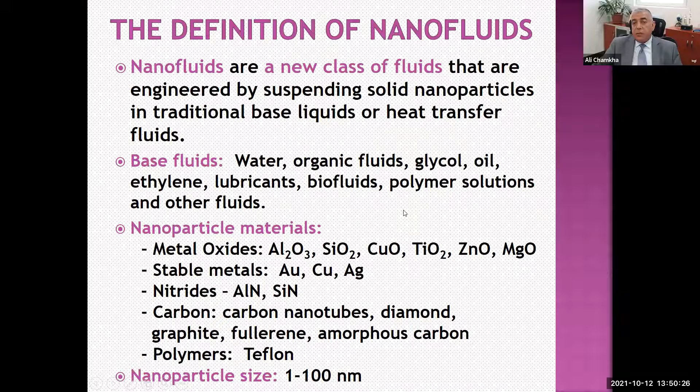Why are nanofluids important? Throughout the lecture, you will see the effect of nanoparticles in fluids called nanofluids. Conventional heat transfer or base fluids have inherently poor heat transfer properties compared to most solids. Nanoparticles have unique properties that can be exploited to develop ultra-high thermal conductivity fluids. Modern nanotechnology enabled the production of nanoparticles less than 100 nanometers.

So in principle, we have a low thermal conductivity fluid, and then we have particles with the thermal conductivity of a solid. We mix them together, fully suspended in the base fluid. Once we have that, the thermal conductivity of the so-called nanofluid will be much higher than the base fluid used in industry.

So therefore, here you will see thermal nanofluid heat transfer enhancement, thermal conductivity enhancement. Reports have shown a breakthrough substantial increase of 20 to 30% in thermal conductivity of a base fluid, by adding very small amounts, 3 to 4%, depending on the type of nanoparticles, of suspended metallic or metallic oxide nanoparticles or nanotubes.

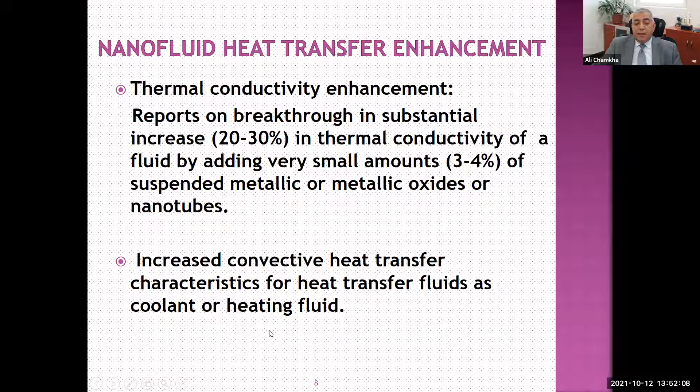Microparticles settle and tend not to add to the thermal conductivity, and therefore do not enhance heat transfer. They will also cause lots of problems in terms of erosion and corrosion of the internal pipe material. In principle, nanoparticles have a very high surface area, much less for microparticles.

If you look in terms of stability criteria, microparticles settle in the flow when suspended in a fluid, while the beauty of nanoparticles is that they remain stable in suspension almost indefinitely in the fluid.

Surface to volume ratio is 1 for microparticles; it's 1,000 times larger than that of microparticles for nanoparticles. Thermal conductivity is low for microparticles, high for nanoparticles when used in fluids.

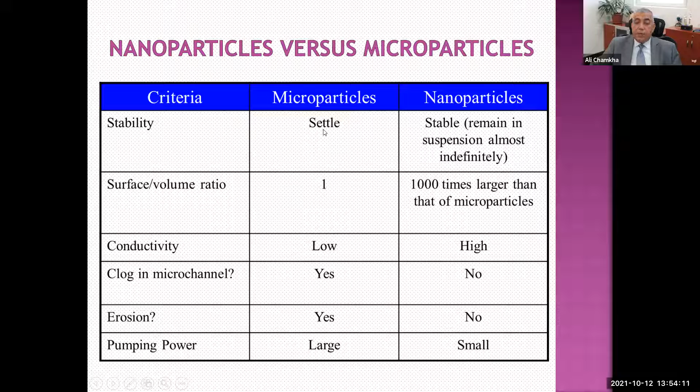The clogging of microchannels: microparticles do clog the channel, while nanoparticles, because they move along the same streamlines of the fluid, do not clog the microchannel. Erosion: because of their weight, mass, and bigger size, microparticles cause erosion, while nanoparticles do not. In terms of pumping power, it is larger to pump microparticles than it would be for nanoparticles.

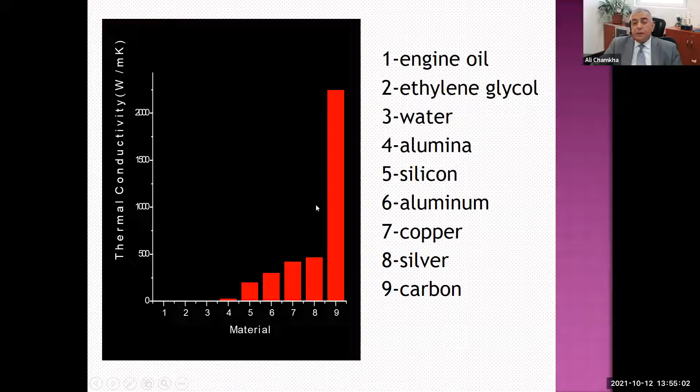What affects the thermal conductivity of nanofluids? The factors that enhance thermal conductivity are particle material - what it is made of, the particle size - big or small, particle shape, the base fluid in which the nanoparticles are suspended, the pH, particle volume concentration or amount, and temperature, which is also important.

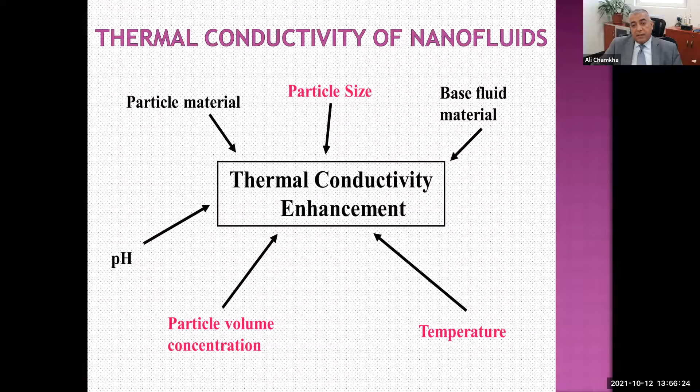Shape is another important factor - nanoparticle shape, whether spherical, cylindrical, or otherwise, matters as well. Now, potential benefits of nanofluids. Excuse me if I'm going a little fast because of the number of slides and the limited time I have.

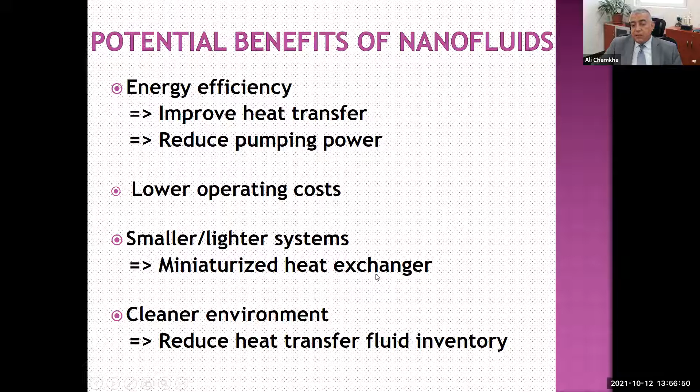Energy efficiency - you will have improved heat transfer. That's a benefit of nanofluids: improved heat transfer, reduced pumping power, lower operating cost, smaller, lighter systems like miniaturized heat exchangers, and a cleaner environment because you reduce heat transfer fluid inventory.

In terms of applications, the sky is the limit, but I will mention some here: energy conversion and energy storage systems, electronics cooling, thermal management of fuel cells, nuclear reactors, combustion, superconducting magnets, biological systems and biomedicine - this is heavily used in testing cases, drug delivery in medical applications, and heat exchanger systems.

Now, if I look at an example in a pressurized water reactor nuclear power plant, the limiting process in the generation of steam is the critical heat flux between the fuel rods and the water. Using nanofluids instead of water, the fuel rods become coated with nanoparticles such as alumina or others, which increases the critical heat flux significantly.

The use of nanofluids as a coolant could also be used in accidents, for example in a pressurized water reactor, in emergency cooling systems where they could cool down overheated surfaces more quickly, leading to improved power plant safety.

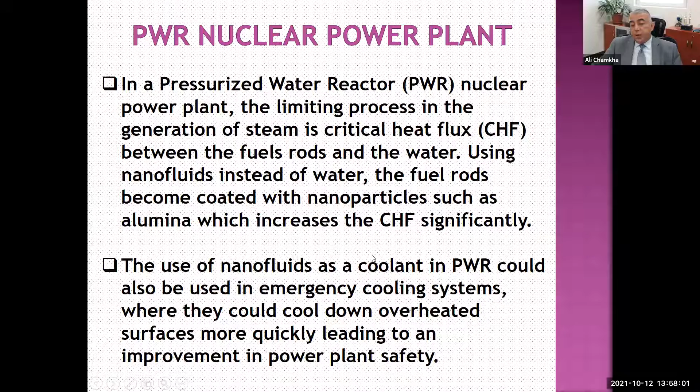Now, in automotive applications, engine oils, automatic transmission fluids, coolants, lubricants, and other synthetic high-temperature heat transfer fluids found in truck radiators, engines, and HVAC have inherently poor heat transfer properties. These could benefit from the high thermal conductivity offered by nanofluids.

Nanofluids as coolants allow for smaller size radiators and coolant pumps, and truck engines could be operated at higher temperature, allowing for more horsepower. They also lead to a reduction of the frontal area of the radiator by up to 10%. This reduction in aerodynamic drag can lead to a fuel saving of up to 5%, based on studies.

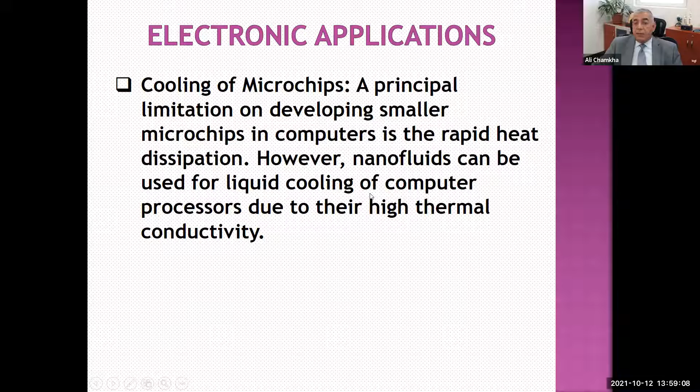If I go to electronic applications, cooling of microchips is a need for the computer business. A principal limitation for developing smaller microchips in computers is the rapid heat dissipation. However, nanofluids can be used for liquid cooling of computer processors due to their high thermal conductivity.

In biomedical applications, which is very important, cancer treatment is very important. Iron-based nanofluids can be used in cancer imaging and drug delivery or radiation. Magnetic nanofluids can be used to guide the nanoparticles up the bloodstream to a tumor with magnets. This will allow doctors to deliver high local doses of drugs or radiation without damaging nearby healthy tissue, which is a significant side effect of traditional cancer treatment methods.

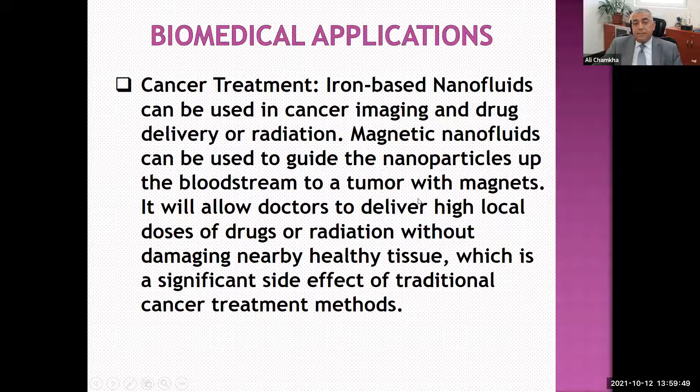Now, unique properties of nanoparticles, as we said: size-dependent physical properties, larger surface area, larger number density, and surface structure.

The effect of nanoparticle clustering is important. The beauty of nanofluids is that the nanoparticles remain suspended in the base fluid at all times—this is when you get the most effect from them. There is lower enhancement of thermal conductivity for closely packed clusters. Agglomeration is a problem when particles cluster together, whereas high enhancement of thermal conductivity occurs for clusters of particles separated by a liquid layer, which is better.

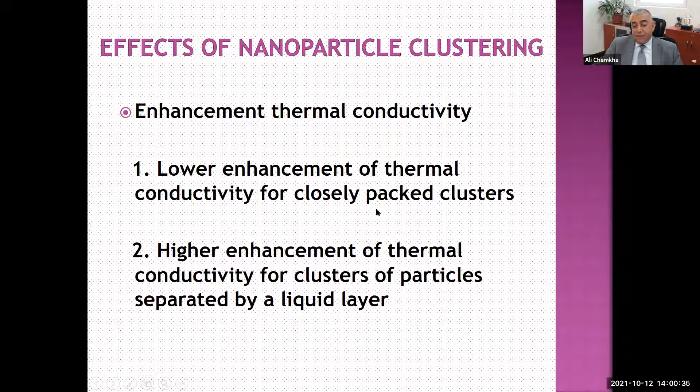Looking at this picture of thermal conductivity versus volume fraction: if you have completely packed nanoparticles, they become bigger particles with no fluid between them, so the thermal conductivity is low compared to more separated nanoparticles. When you allow the fluid to go inside, like here, you get more heat transfer effect.

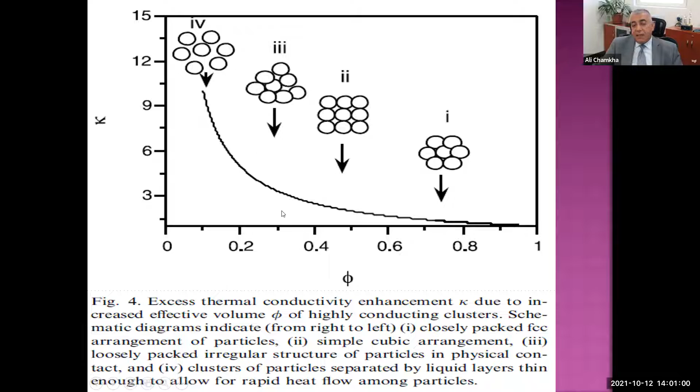What problems do nanofluids face? The rapid settling of particles in fluid—if they settle and do not remain suspended, this is a problem. The small size of nanoparticles should improve the stability of the suspension, but agglomeration is the biggest problem studied, where nanoparticles combine into larger particles found in liquids, which is a serious challenge. When nanoparticles agglomerate with other particles, they become bigger particles and we cannot benefit from them. So sedimentation, settling, and agglomeration are the problems.

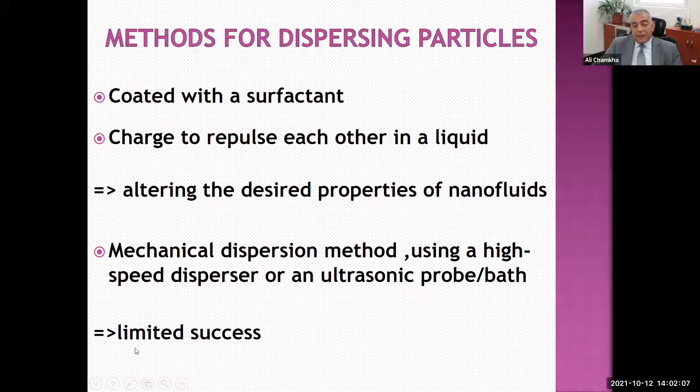What are the methods for dispersing particles? One is coating them with a surfactant, charged to repel each other in the liquid. However, if we use this, we alter the desired properties of nanofluids, so we don't get the benefits we need. Another is the mechanical dispersion method, using a high-speed disperser or an ultrasonic probe bath, which has shown limited success.

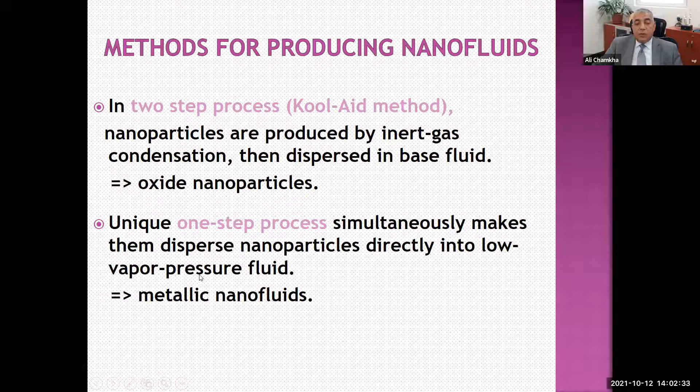Methods for producing nanofluids: we have the two-step process, where nanoparticles are produced by inert gas condensation and then dispersed in a base fluid—this is usually used for oxide nanoparticles. There is also the unique one-step process, which is better, simultaneously making and dispersing nanoparticles directly into a low vapor pressure fluid; this is usually used for metallic nanofluids.

Why are nanofluids investigated? They have been studied to identify the specific transport mechanism, to identify critical parameters, to characterize flow characteristics in macro, micro, and nano channels, to quantify heat transfer performance, to develop specific production management and safety issues, and measurement and simulation techniques, among others.

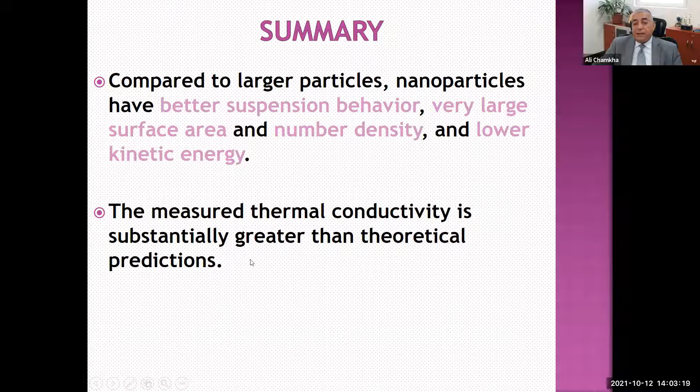In summary, compared to larger particles, nanoparticles have better suspension behavior, very large surface area and number density, and much lower kinetic energy due to their low mass. The measured thermal conductivity is substantially greater than theoretical predictions in reality.

Now I want to run through various types of problems that I have solved over the years using nanofluids, using different nanofluid models and different problems, and see the various things we found.

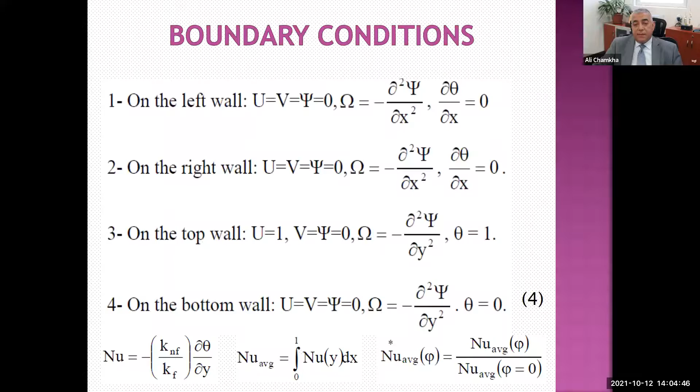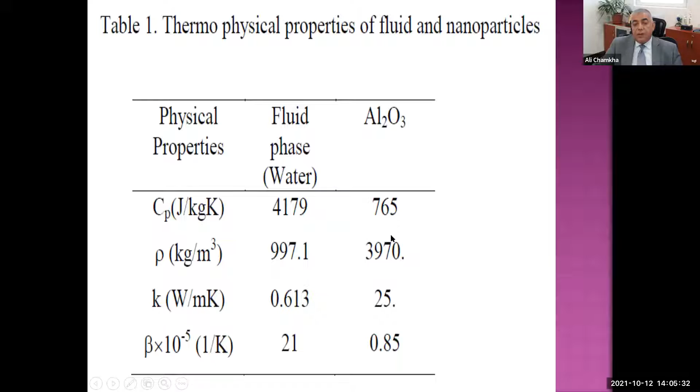For the thermal conductivity model, we use the Maxwell-Garnett model. This is the model, and then we predicted some properties for the base fluid, being water, and alumina. The thermal conductivity is 0.613 for the base fluid water, while it's 25 for the alumina. Mixing those together gives better performance in terms of heat transfer.

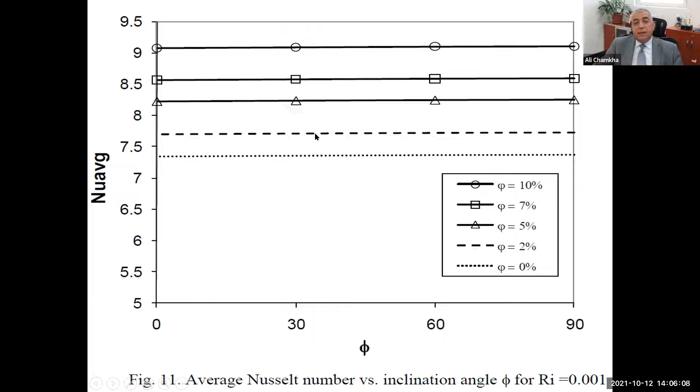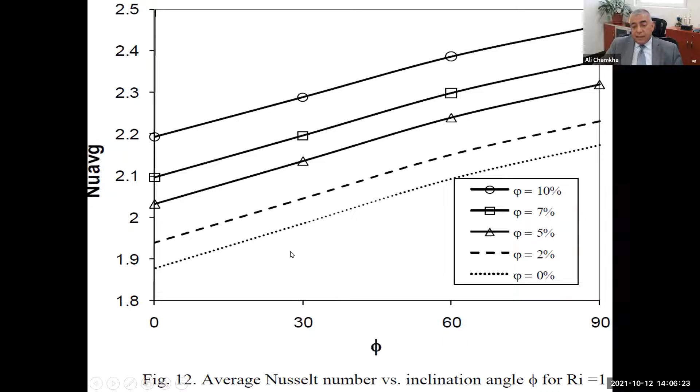You will see that in principle, as you increase the volume fraction, you will have an increase of Nusselt number. This is the case of Ri=1, mixed convection. You will see as you increase the inclination angle from 0 to 90 degrees, the Nusselt number increases, as well as it increases as the volume fraction increases, and they look linearly increased. Same thing for the fully convection case, where the Nusselt number increases as the inclination angle and volume fraction increase.

Now for another problem, we used a solar collector filled with a nanofluid. This is a schematic diagram of the solar collector. You have solar energy coming in this way. This is the cover plate, this is the water-alumina nanofluid, this is the wave-like absorber we were considering, this is the cool surfaces, this is insulation, and this is the hot surface from the radiation.

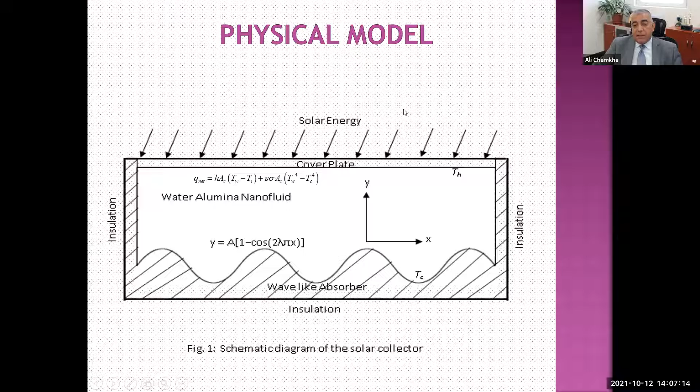We calculated this based on the basic principles of Navier-Stokes equations, modified to use the nanofluid, as you can see here. These are the properties. Here we're using the same thing, the Brinkman and Maxwell-Garnett model, with no changes here.

If we look at some of the results for different shapes, these are typical isotherms and typical streamlines. You will see the occurrence of multiple vortices in the system, which will affect the heat transfer. When the absorber has only one shape with no wave, you will see one streamline, one vortex enclosing the whole system.

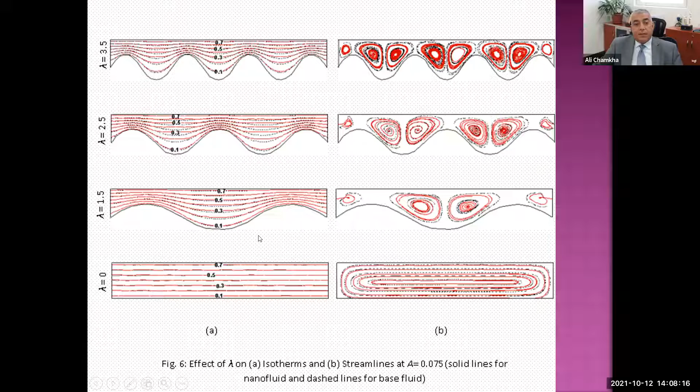Same thing here, you will have a different type - now we're varying the effect of lambda. And then if you look at the Nusselt number here, this is the nanofluid. You'll have enhanced heat transfer or energy collection using nanofluid.

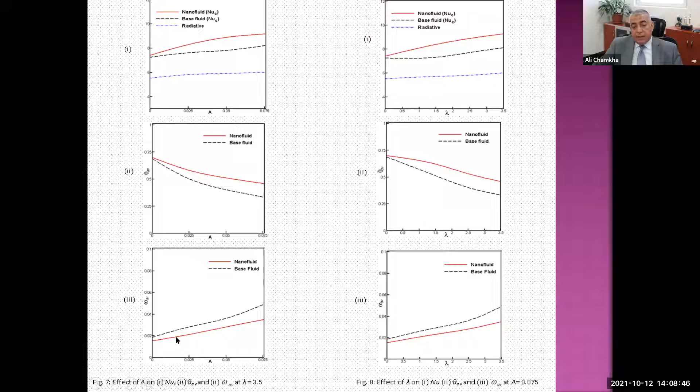This is the radiation heat transfer, this is the base fluid heat transfer, and this is the combined nanofluid heat transfer. This is the average temperature, which is enhanced using nanofluids. This is the average velocity, which is reduced as a result of nanofluids, and the same here.

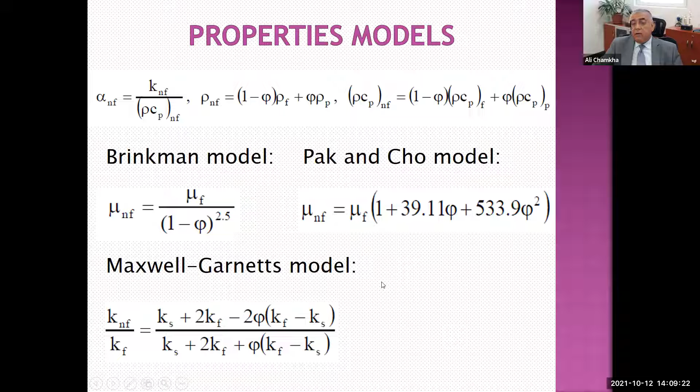And there's a critical condition. So it's not a complete or correct statement to say that if you suspend nanoparticles in a fluid, you always enhance heat transfer. Sometimes you get the reverse effect, and this is an example.

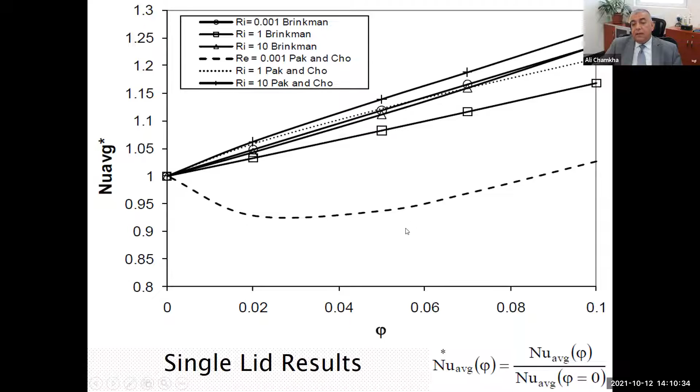By using a different model, we got a different result, and this is based on an experimentally verified model. We found this for this case, so there are some conditions where the Nusselt number decreases as a result of adding nanoparticles. So it's not the same whether you use the Brinkman or the Pak-Cho model. This is another trapezoidal model for nanofluids.

Let me run quickly here through the same types of models, and I want to show some things here.

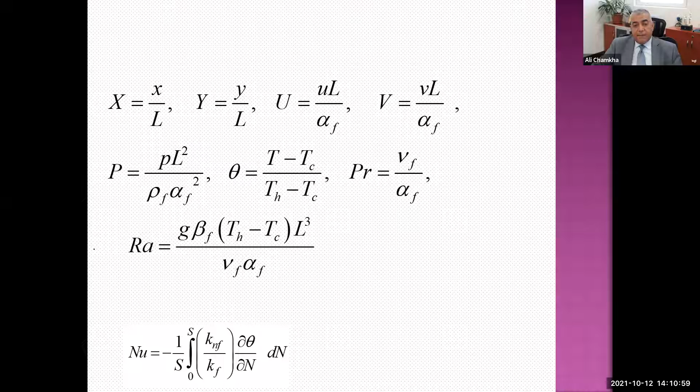Okay, here we're using copper as the nanoparticles. I'm running quickly because I have other stuff to show.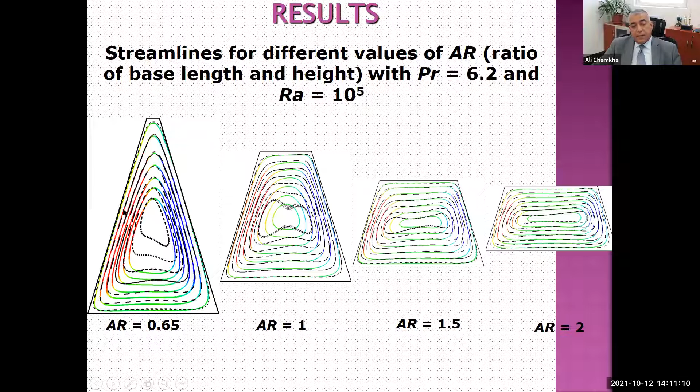This is based on the aspect ratio of the trapezoid. You can see here the streamlines, and these are the isotherms. I want to go to the average Nusselt number.

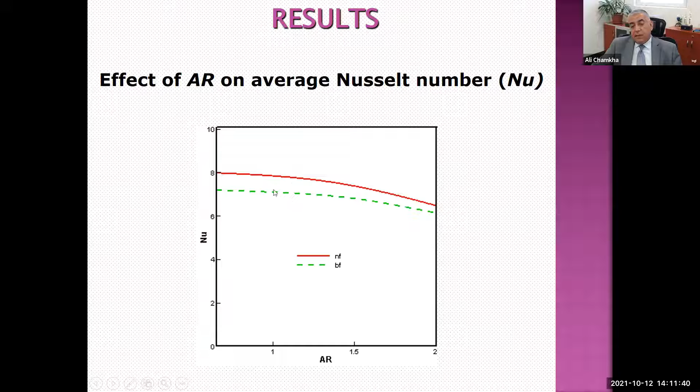Again, you will see an enhancement, you have reduction whether for the base fluid or for the nanofluid, as you increase the aspect ratio of the trapezoidal cavity. If you use base fluid or nanofluid, you have enhancement for the Nusselt number.

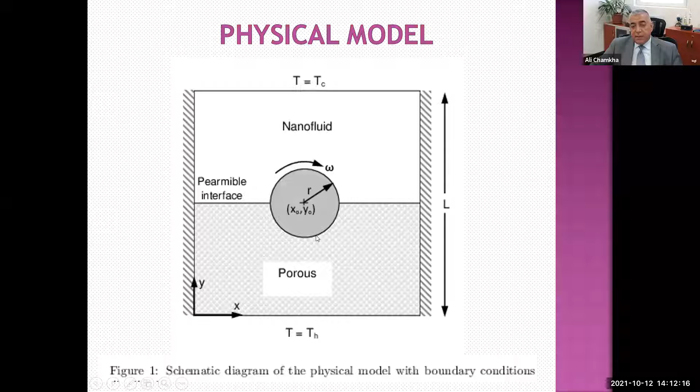Now if I look at another more complex problem - the earlier problems before were slightly simple. Now here I have a complex problem where I have clear fluid, nanofluid being used. Here I have a porous media, I have a cylinder that's rotating, a permeable interface, and these are complex equations.

We have identified, we put epsilon and delta in this to have a generalized model, depending on the region, for different equations that dominate in different regions. So we put epsilon when it is 1, it applies for the nanofluid layer. If it is kept as epsilon, it's for the porous layer. Same thing for delta: 0 for nanofluid layer, and 1 for porous layer. And for the thermal diffusivity, it's alpha F for nanofluid, alpha eff for the porous layer.

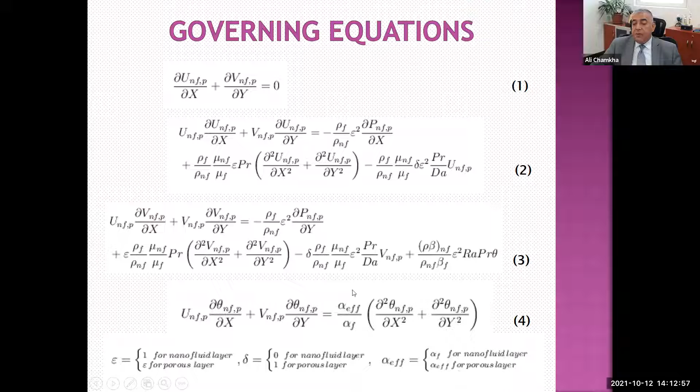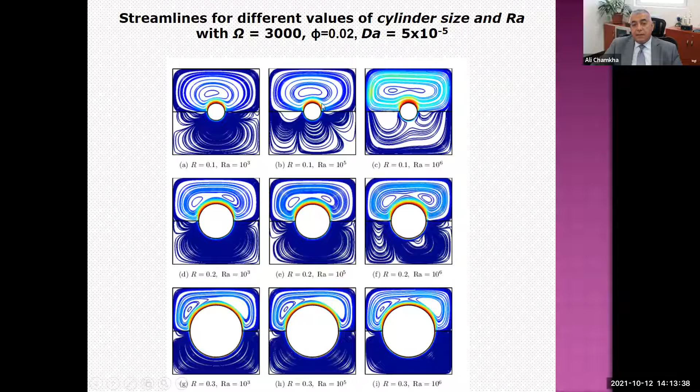These are the streamlines that you can see as this cylinder rotates, and here are the isotherms. I want to go to the Nusselt numbers - here you see the Nusselt number because of the rotation.

You will see that as you increase the rotational speed - 500, 2000, 6000 - you increase the Nusselt number. This is for different radii, and this is the mean Nusselt number. You will see that as the radius of the cylinder increases, you will have increased Nusselt number. As you increase speed, you also in principle increase the Nusselt number.

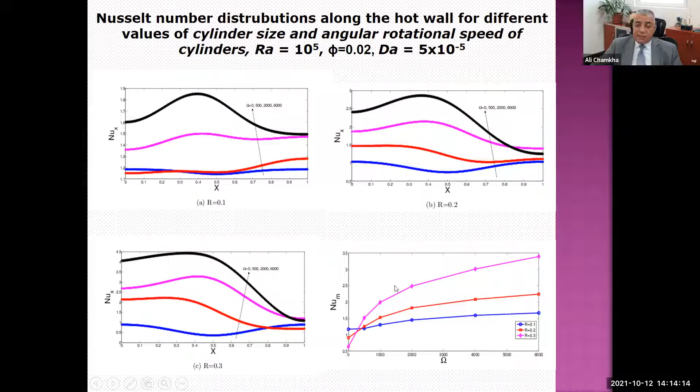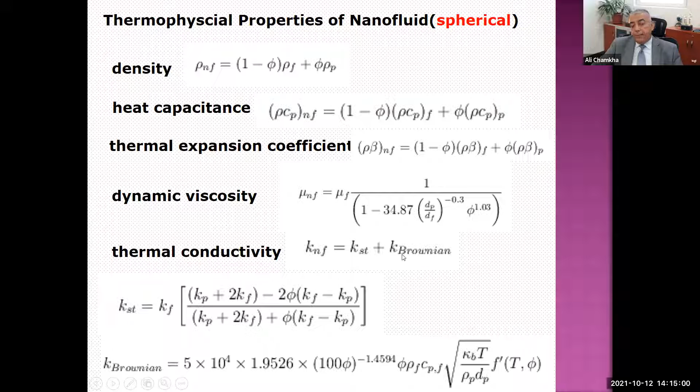This is the Brownian part, because here the thermal conductivity for the nanofluids is the static part and the Brownian part, and these are added together. Again, the dynamic viscosity here is different. We have used a linearized thermal conductivity model like this that's based on the shape. So you will see the shapes we considered were cylindrical particles, brick, and plate.

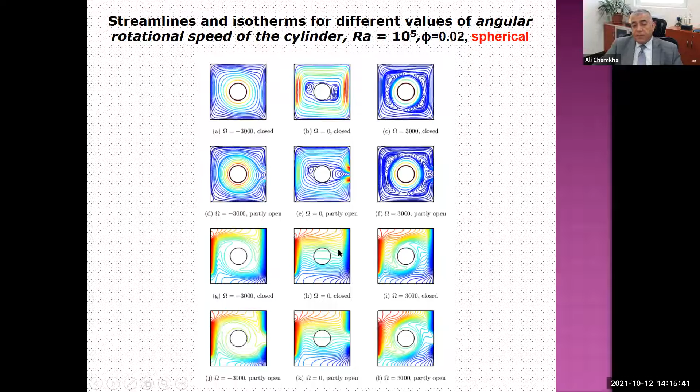Let's go here to the results of the Nusselt number. You will see, in principle, a reduction as you increase the speed. For these cases, you'll have a reduction of mean Nusselt number. However, if you look at the shapes of particles - the blue is the sphere, the red is the blade - the cylindrical nanoparticles have the best effect, enhancing heat transfer over the other shapes.

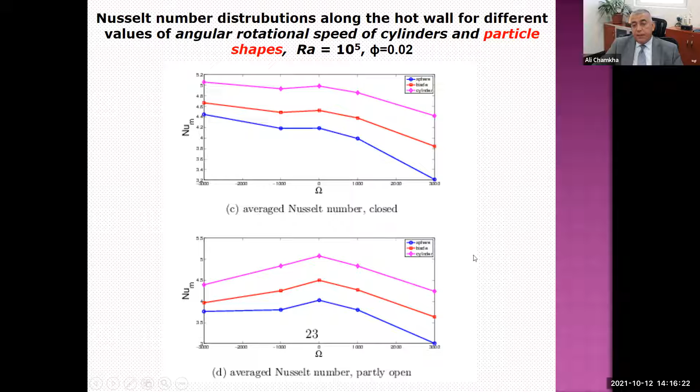Same thing here - the cylindrical shape gives the highest mean, whether it's open, partly open, or closed. Similar effect, different values, of course. And here you will have the mean.

Now I go to an important problem, which is melting of nanoparticles, enhanced phase change materials in an enclosure, effect of hybrid nanoparticles. We use hybrid nanoparticles. This is a cavity that has phase change material, hybrid nanoparticle material, and you have a heated surface and a cold surface. As the mixture melts, you'll have a liquid part here, a solid part that's not melted, and a melting front moving in this direction.

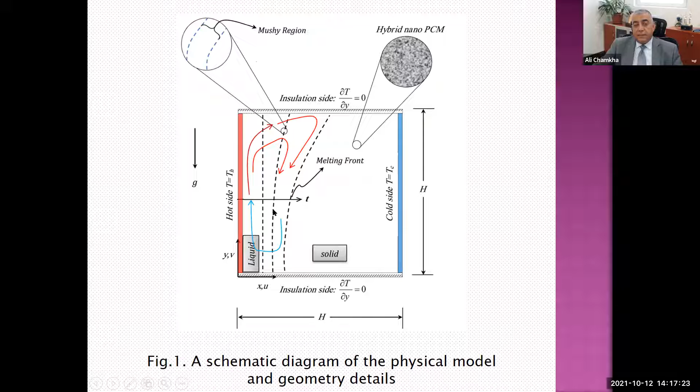And this is the diagram. This region where you have mixed solid and water, this is the mushy region. You have to model it differently.

If you look at the model, this is the model, and you will have here, for example, everything. This is the viscosity of the hybrid nanofluid, and this is the viscosity of the base fluid. What's different here is that S is the Carman-Kozeny model that expresses the effect of damping in the mushy region.

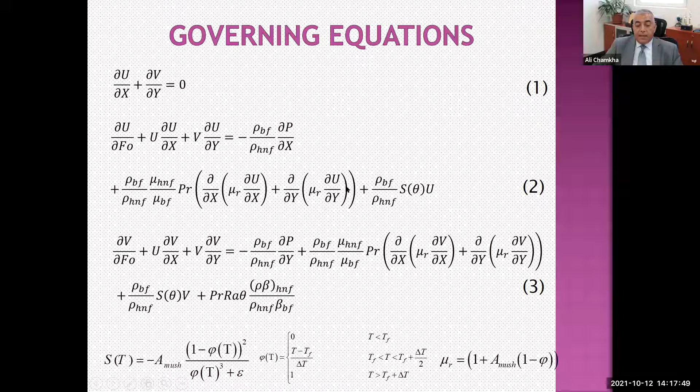In the Carman-Kozeny model, it is assumed that the region is a porous medium. The mushy region is assumed as a porous medium, in which moving from liquid toward the solid part, the porosity and permeability of the medium get very low, and hence the velocity of the fluid tends to zero. And now phi of t here is the liquid volume fraction.

And these are real data that we have modified. I will show you in a minute. We have also linearized the thermal conductivity data, and this is the thermal conductivity constant, etc.

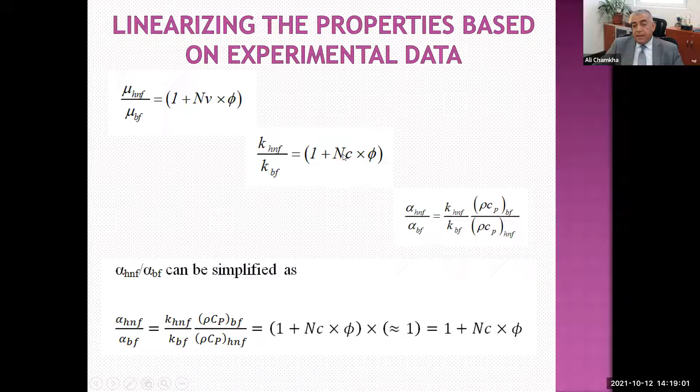So these are the two models that are being used, and then the ratio of the thermal diffusivity for the hybrid nanoparticles, nanofluid. We have NC is the hybrid. NC comes as the coefficient or parameter for enhancement of thermal conductivity.

These are typical data. If you look at the results, I'll show a small video here. Here we have NC equals 0, Nv equals 0, that is base fluid, we don't have any nanoparticles. So base fluid. Here we have volume fraction of nanoparticles 5%, and Nc and Nv coefficients of viscosity and thermal conductivity set to these values.

You can see that when you have nanoparticles, you have faster melting. As you can see, the front is moving in this direction. This is delayed for the base fluid. So you'll see enhancement.

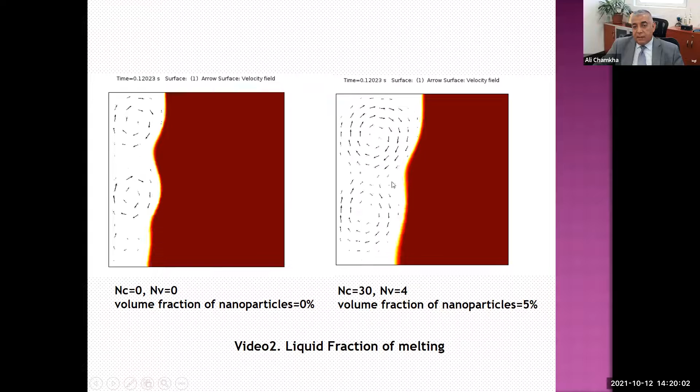And this picture was the liquid volume fraction. As you can see, if you want to see it, we can see it one more time, as it is important. And you can see here the formation, now you're melting quicker than here. You have the recirculation zones, the mushy zone is here. Then you start movement, and then you can see this line. And then you finish it with only 5% of nanoparticles.

Now here are some pictures taken from the same color scheme, for the base fluid without nanoparticles, and here with nanoparticles. You can see the melting interface as you are moving in the direction of melting. This is for different volume fractions, 0 volume fraction, etc. Same thing here.

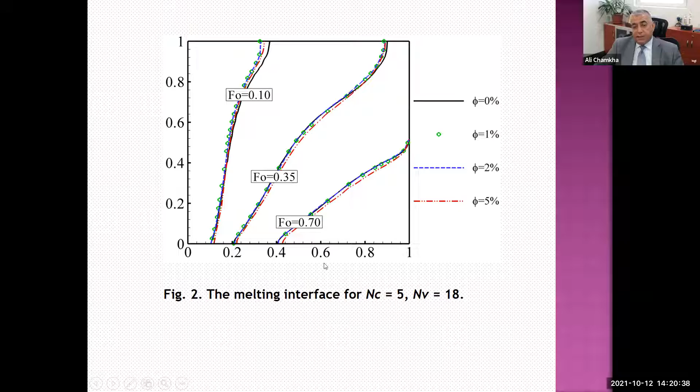Another problem we've solved is using fluid structure interaction. This is where we have a cavity and a moving oscillatory or oscillating fin. It's a very important fluid structure problem.

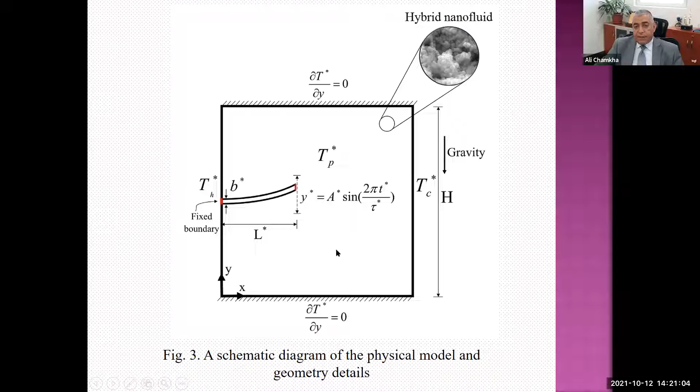We can model it this way. You have hybrid nanofluid inside, this is the fin that is moving, oscillating. And then these are the main equations.

These equations are for geometrically nonlinear elastodynamics. These are the stress. Displacement, ds is the displacement.

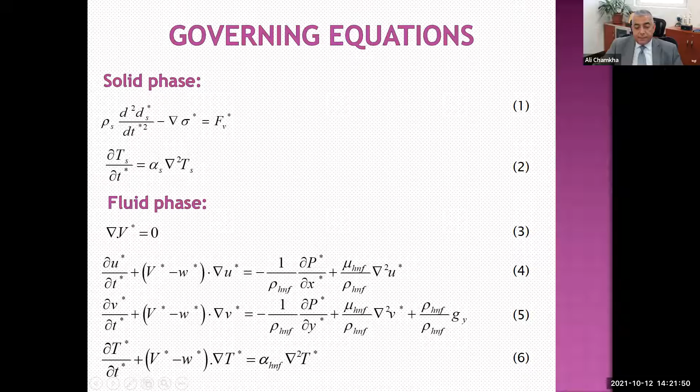We use the second Piola-Kirchhoff stress tensor for the stress here. And therefore, these are the governing equations, and these are typical boundary conditions. This is the interaction condition.

And then this is the, not coming out, computational mesh.

You can see how the mesh changes as this fin oscillates, so you have different meshing.

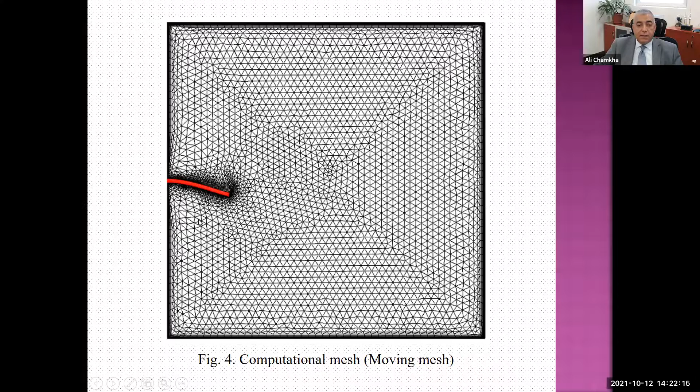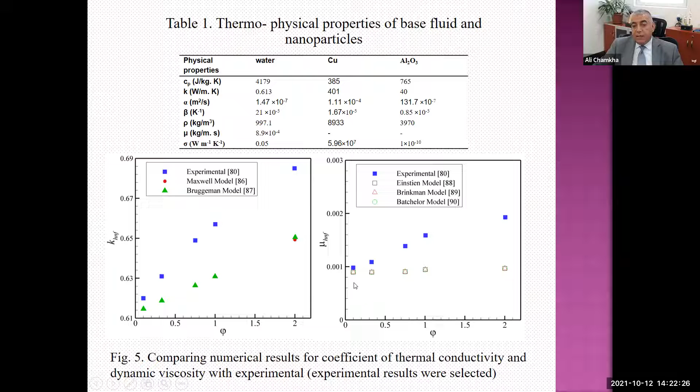These are the experimental data we found for the thermal conductivity of hybrid nanofluid, and this is the viscosity, which we modeled with a linear model.

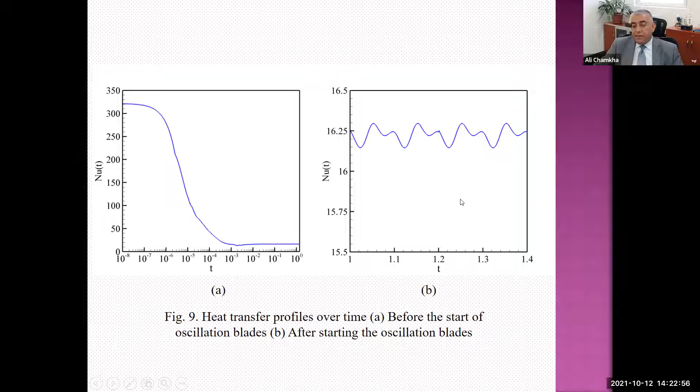Here you'll see how the Nusselt number as a function of time decreases. Here, before motion is set. And here, when you have motion, the fin is moving, and you will see this oscillation.

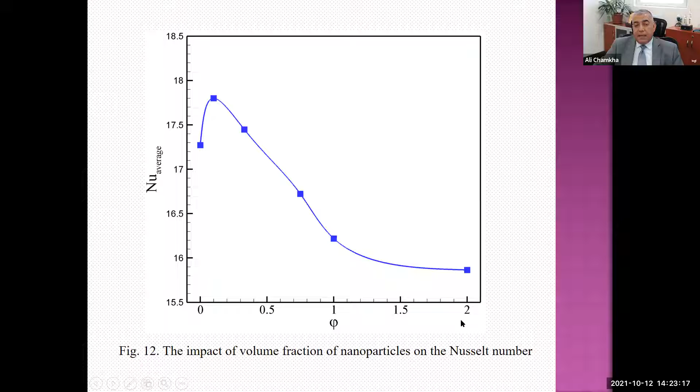Same thing here. Now, in principle, for this type of problem, as you enhance the volume fraction of nanoparticles, you have, in principle, a reduction in the average Nusselt number due to the oscillation.

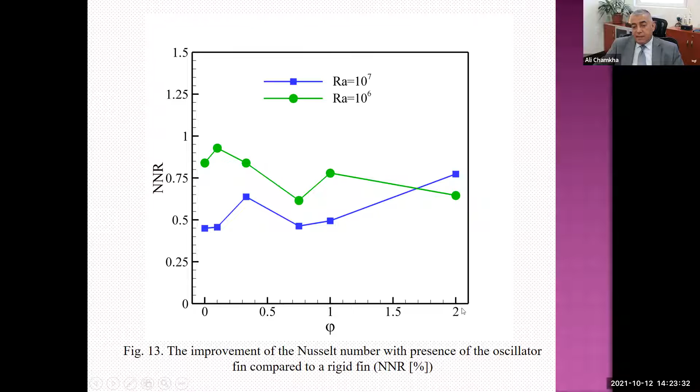Same thing here, you'll see for different Rayleigh numbers. As you increase the Rayleigh number, it decreases except for high volume fraction.

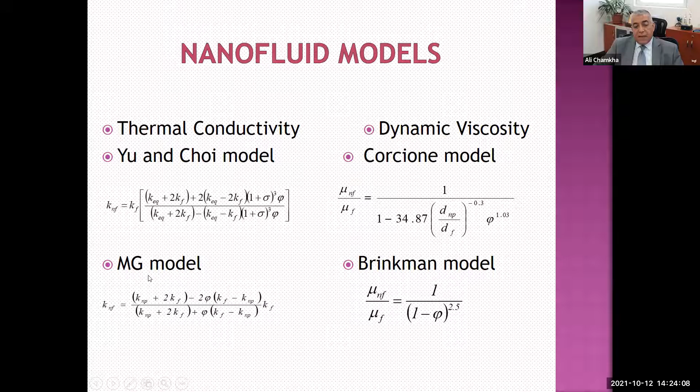And we try to see what type of results we get. In principle, you see again the reduction of heat transfer or Nusselt number for this type of model, which is MG. And if you take the thermal conductivity model of Maxwell and Garnett and compare it with the Corcione model for viscosity, you'll see again the reduction.

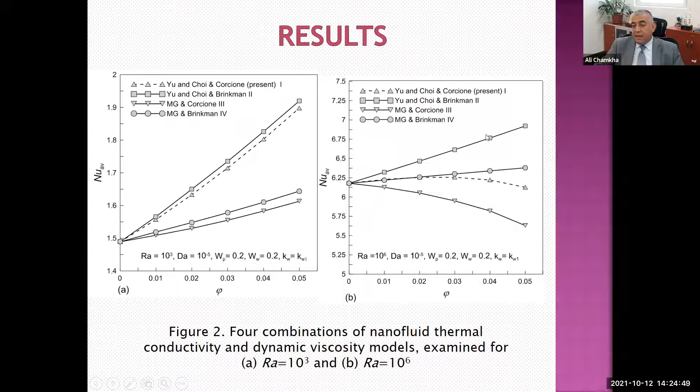That's what we saw in the Pak and Cho model in the simple problem we showed. So again, I wanted to show here that it's not always true that when you increase the volume fraction of nanoparticles, you get enhancement of heat transfer. It depends on the model you're using.

And here it raises a big problem, a big question: what type of model should we use? Which is more accurate? Which is the correct one? That's something left to be done in modeling, in finding models for nanoparticles and nanofluids.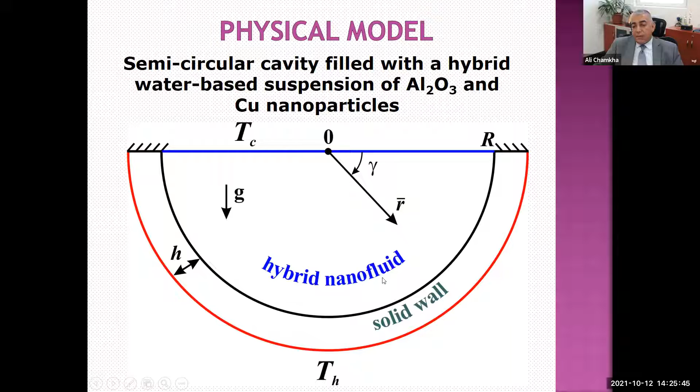So we have conjugate and we have hybrid nanofluids, typical questions here. Now let me go directly to the results to save time. And the important thing is this model for the hybrid nanofluid.

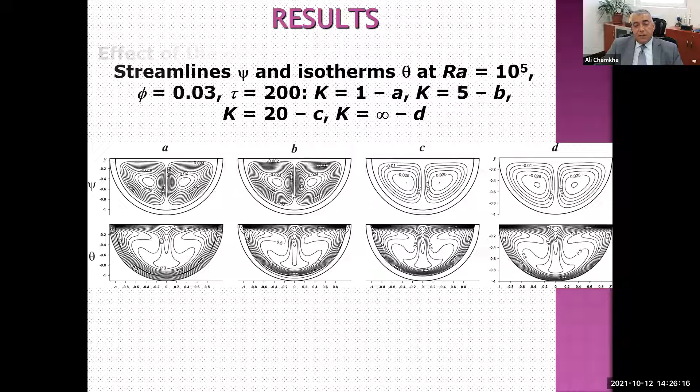You'll see here that over time, the interface heat transfer decreases, while it increases as you enhance the Rayleigh number. Same thing here. This is the ratio, the thermal conductivity ratio between the fluid and the solid, the thick wall.

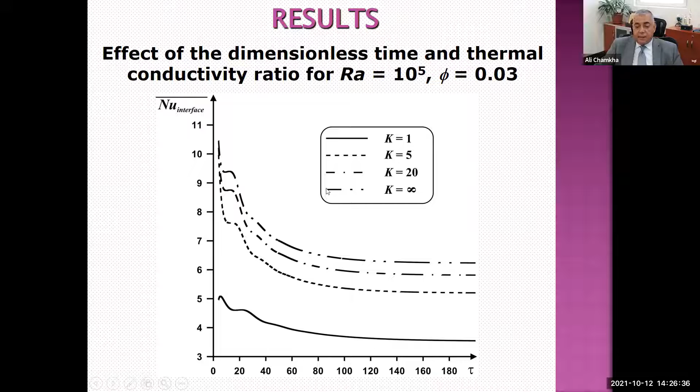And then you see this effect here with volume fraction. Here, as you enhance the volume fraction, you have enhancement of heat transfer.

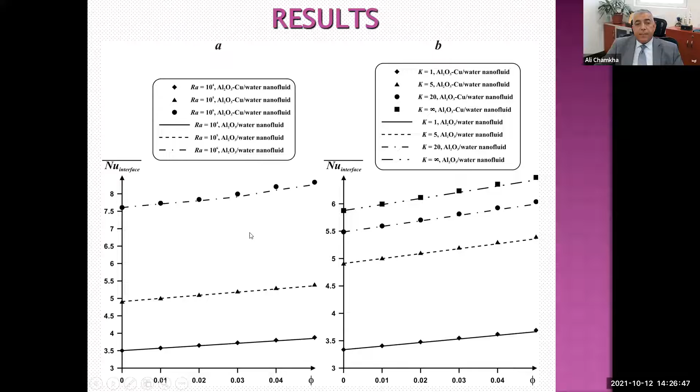Similar stuff. Now I've finished these types of problems. Now I have another interesting problem. I don't know if I still have time for the presentation, but I will run through quickly to give you a flavor of that.

Boundary layer flow and heat transfer of nanofluids over a flat plate, a typical problem. The objective is to analyze convective boundary layer heat transfer of nanofluids, considering different types of convection: forced convection on a horizontal plate, and natural convection over a vertical plate.

The plate in clear fluid, whether embedded in porous media, whether we have nanofluids or not. So various problems we considered, and we considered volume fraction, material of nanoparticles, size of nanoparticles, shape of nanoparticles, type of base fluid, working temperatures, many conditions.

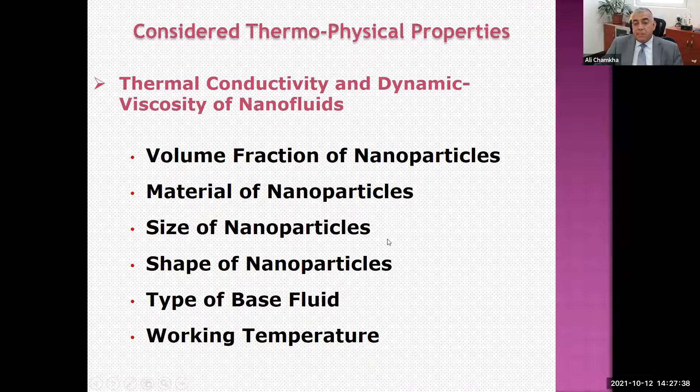Now, these are the basic linear relations that I showed you in the melting problem, where we have linearized models for the thermal conductivity and the viscosity. And these are typical models that we use for this.

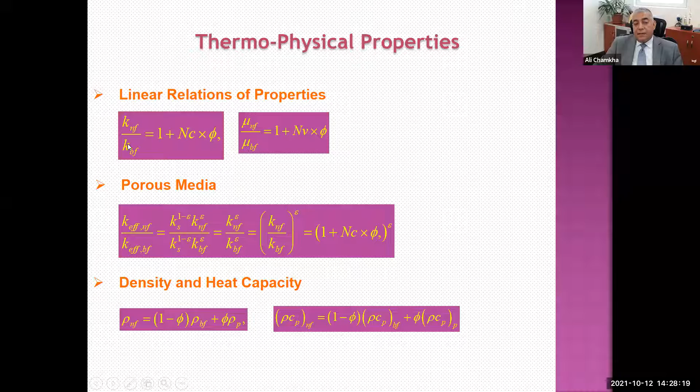I'll remind you of the parameters, Nc and Nv, Nc for the thermal conductivity and Nv for the viscosity. So we got the numbers we want, and then we plug them in to find effects. I'm not going to go through that for lack of time.

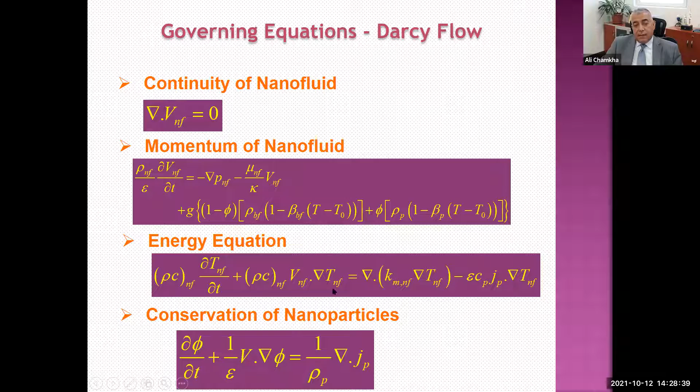These are the basic equations that we use for clear fluid, for nanofluid, and of course this is for Darcy flow, and you see these for nanofluid.

Now here, the drift flux effects: you have diffusiophoresis, Magnus effect, shear-induced gravity effect, Brownian diffusion, which is very important, and thermophoresis. For boundary layer fluid flow of nanofluid flow, these are the most important. They are found in the literature.

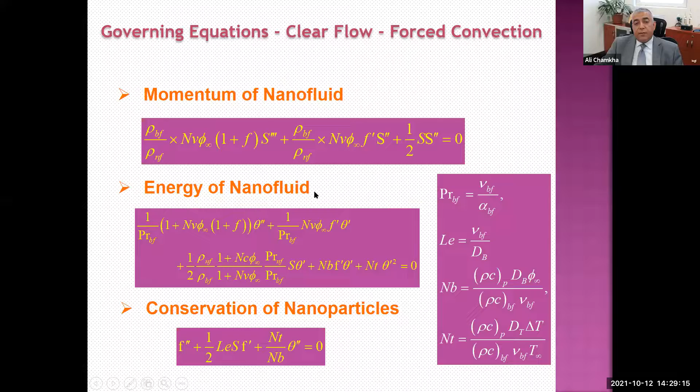And then these are the boundary layer equations. I think I should not go through the whole thing because there are many. I just want to move on for the sake of time because I know my time is up.

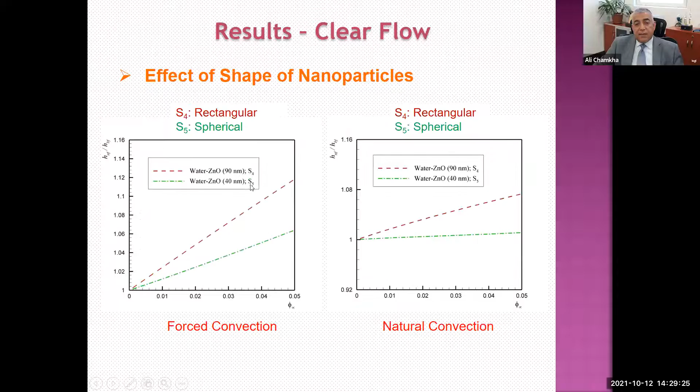Let me go directly. We did many cases. I'll go to the summary and then give you the summary from the results, the conclusion, if I can get to it. Porous media sizes.

In conclusion, we found full similarity solutions were successfully achieved in all studied cases, considering the variable thermophysical properties, Brownian motion, and thermophoresis effects, and also correct boundary conditions for the concentration equation.

A new parameter, heat transfer ratio, we developed: heat transfer coefficient of nanofluid over heat transfer coefficient of base fluid, was introduced to show the enhancement of using nanoparticles in the base fluid.

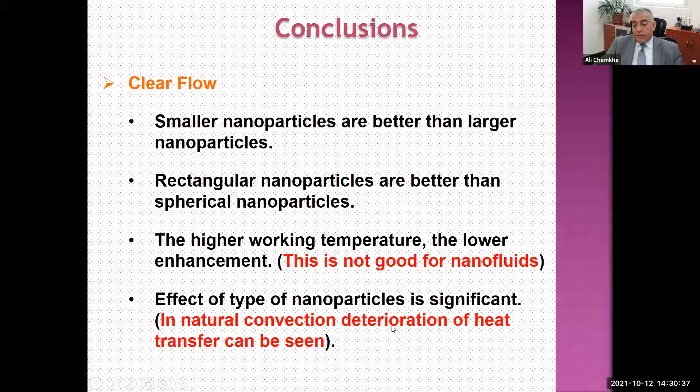Again, for clear fluid, the higher the working temperature, the lower the enhancement. If you increase the working temperature, you get lower enhancement. This is not good for nanofluids. Effect of type of nanoparticles is significant. In natural convection, deterioration of heat transfer can be seen.

For clear fluids of forced convection, the drag ratio using nanoparticles, which we calculated: 5% volume fraction of alumina, 44 nanometers in kerosene shows 30% enhancement in convective heat transfer and 45% increase in the drag coefficient at the surface. 5% volume fraction of alumina, 43 nanometers size nanoparticles in water shows 1% enhancement compared to 30%.

These sizes are very close to each other, but different. Kerosene or water, you have 1% here and 30% there, enhancement in the convective heat transfer, and 44% increase in the drag coefficient at the surface.

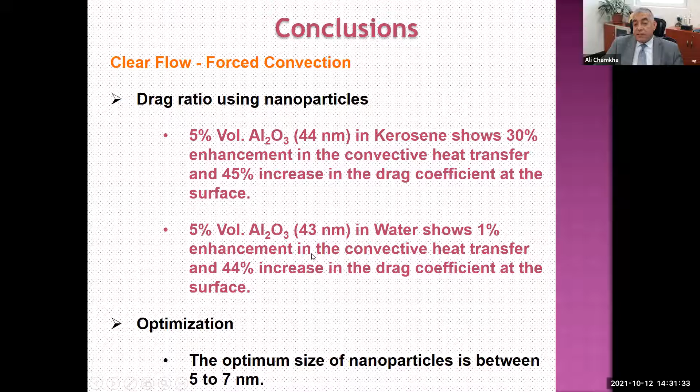Optimization: the optimum size of nanoparticles is between 5 to 7 nanometers for these studies that we did on boundary layer. In porous media, forced convection, in all studied cases, the presence of nanoparticles increases the convective heat transfer. The smaller the nanoparticles, the higher the heat transfer, so lower nanoparticles are better in this case.

Porous media, natural convection: that's forced horizontal plate. This is vertical plate, natural convection. In all studied cases, the presence of nanoparticles deteriorates the convective heat transfer. This is in total contrast with the forced convection here.

The smaller the nanoparticles, the lower the heat transfer. This is in contrast with the forced convection as well. So whether you have forced or natural convection, you have different results for these cases.

Future work: nanofluids development is still considered in a research stage. Many factors need to be explored and optimized. Accurate nanofluid property models based on experimental work are needed. Nanoparticle agglomeration, settling, erosion potential, etc. need to be addressed, including identification of heat transfer enhancement limits in different applications.

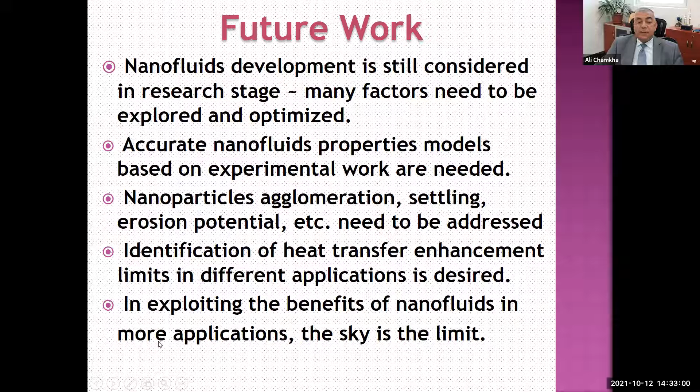Enhancement limits in different applications is desired. In exploiting the benefits of nanofluids in more applications, I can say that the sky is the limit. Thank you very much.